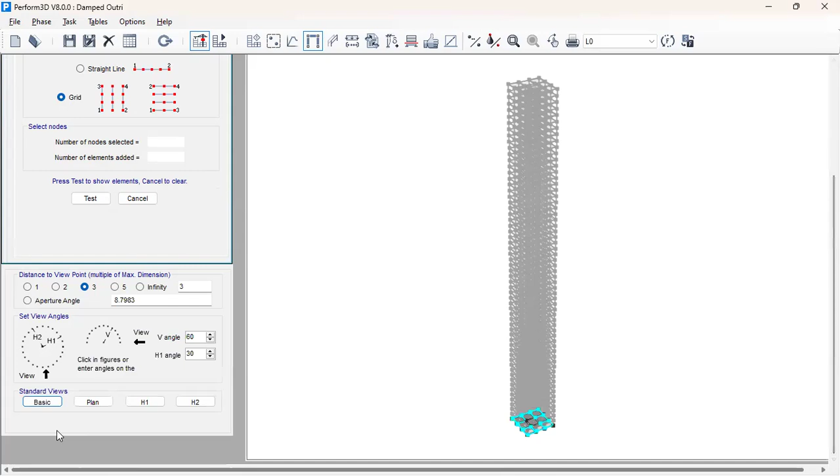So here, at the first or starting point, we have to start from the node points. The nodes have already been assigned and the geometry of the structure has been defined. If we select node 12, this one is the fixed support. For example, if we have to assign the pin support, then we have to go for this in detail. So this one is the pin support.

And also if we have to assign the roller support, we have to go for this one, vertical displacement. And if we select some nodes, now I select this node. Yes, this one is the roller. And this is the inserted boundary. By translation, we have to go for assigning the mass.

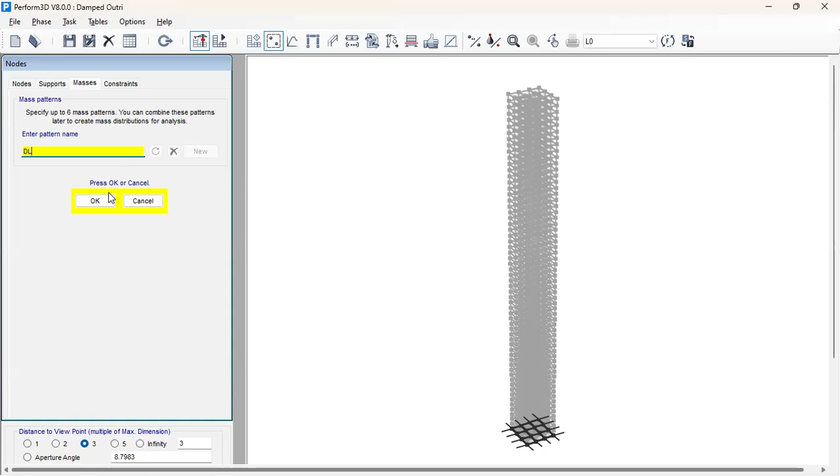First of all, let me introduce the name of the mass source. Let me say dead load 0.25 live load. Okay. Then we have to specify the weight or masses and optional tributary area, like translation or degrees of freedom for translation and degrees of freedom for rotation. So it is 6 degrees of freedom at the node. This can be applied in different ways.

The first way, the simple way, is to import the structure from ETABS and the mass source can be assigned to each node of this structure. And another way is to insert the coordinates and we have to calculate the center point of the structure or lump mass at the story level. We have to input the coordinate here at each story level and input that lump mass.

And another way is to import the coordinates as well as the lump mass as a CSV comma separated file or text file, which can be generated in ETABS.

So I'll try this one. So let me check in ETABS. If we run the structure, first of all, we have to analyze the structure to generate the story mass by diaphragm and export those masses into an Excel CSV file or text file and import those files into Perform 3D, which is

compatible in Perform 3D. So here if we see the display table, we have to go to other definitions for mass data, then click mass summary by diaphragm. Let me check. Yes, these are the masses summary by diaphragm. So let me export these masses to an Excel sheet and I will convert this into a CSV file. So the Excel sheet is generated here.

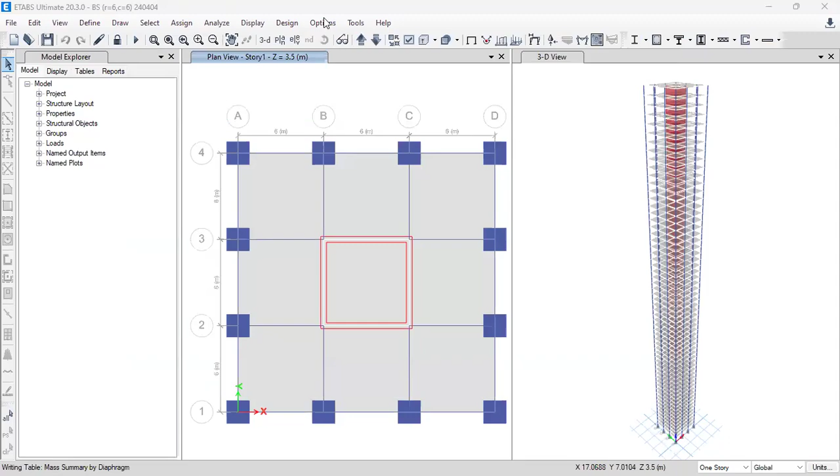Now first of all we have to import the nodes only. For the node to be imported, this line must have H1, H2 and V coordinates of the node and may also have the load or mass. Nodes must be set before load or mass have been imported. So first of all, we have to import the nodes for the diaphragm masses, and after that, we have to import the masses or load. So let me make that Excel file compatible, a Perform-readable file.

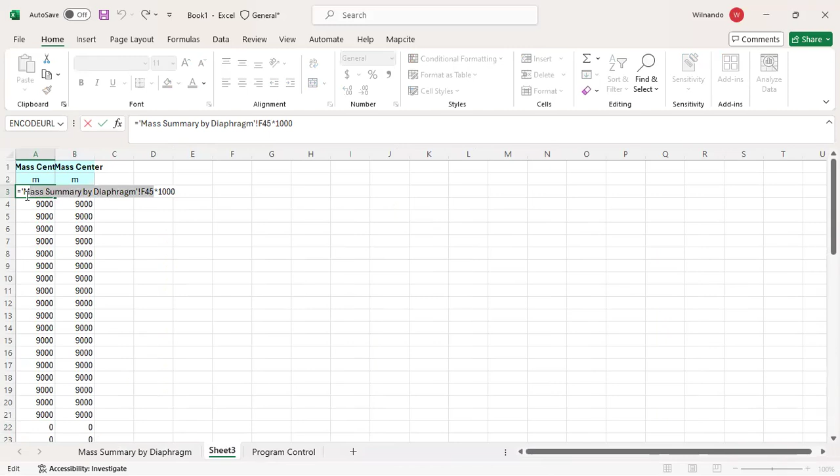After that, we have to go for H1 translation, another one is H2 translation, third one is V translation, fourth one H1 rotation, H2 rotation, and finally V vertical rotation. So here we have to copy the masses in X for this one, and this one is 0. There is no value for V translation. Similarly, H1 rotation is also 0, and H2 rotation is also 0.

And the value given in the table is moment of inertia, which is called V rotation. This value is rotation along the Z direction. Okay. So let me shape this V rotation. This value is rotation.

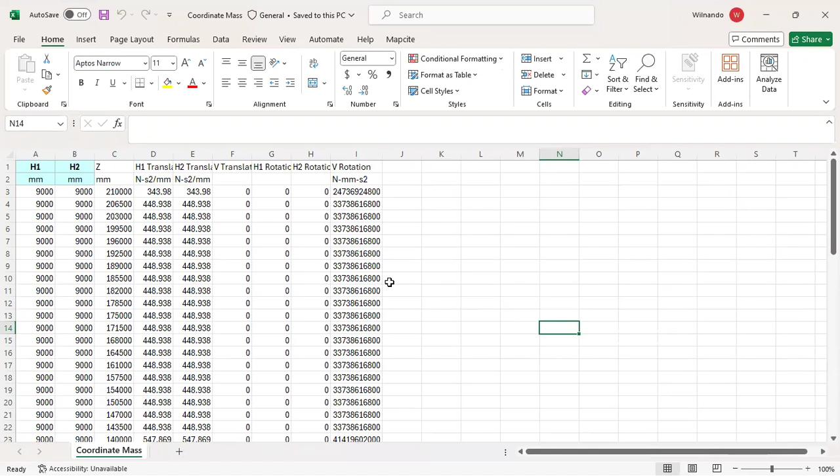So let me import. Yes. Comma delimited file, somewhere in my system. Yes, right, this one. And at the time of importing the file into Perform 3D, you have to skip the first two lines. Okay.

So let me import this coordinate CSV file here. Then from the import option, go to nodes only. I browse the location, the coordinate file which I recently saved, and we have to skip the first two lines, as I already mentioned, in the CSV file. Then this file contains load or mass. Yes. Let me test. Okay.

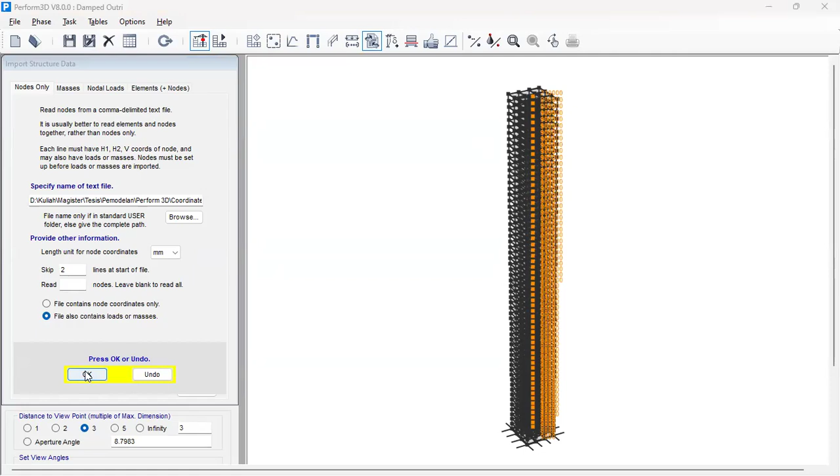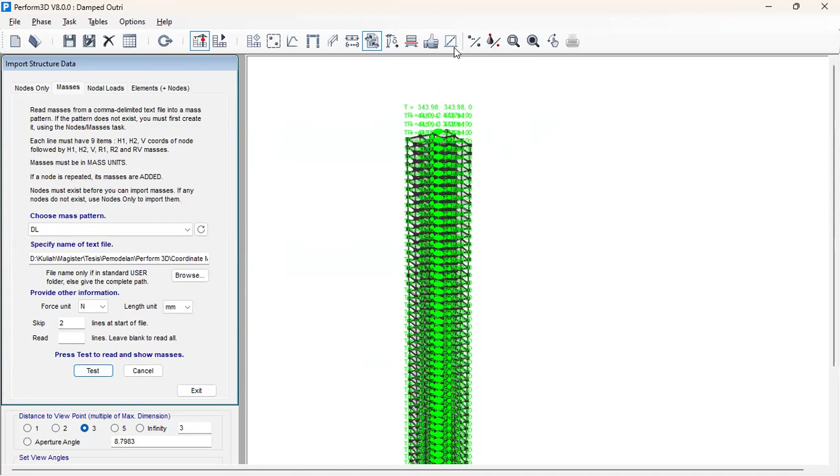Okay, the masses which have been copied in the CSV file have been read by this software by importing the comma separated file. So let me check. Okay, after doing this, we have to update the story level, because at the story level the coordinates for lumped mass have been assigned. So we have to assign this coordinate in each story. So if I go to frame here, let me go to story one, and let me check this.

So let me convert this 3D into this elevation, either H1 or H2. Then for story one, other nodes have already been selected and assigned, and the remaining node is the last node we had just assigned for the lumped mass system. So this is updated.

And similarly for story two, there is also only one value. So this is the point where in ETABS we saw the diaphragm like this. Yeah, like this we assign for these coordinates. So after this, we have to go for constraint.

In ETABS or other FEM software, the diaphragm is assigned either with the help of joint or with the help of shell: shell diaphragm or joint diaphragm. So in Perform 3D, we have to first

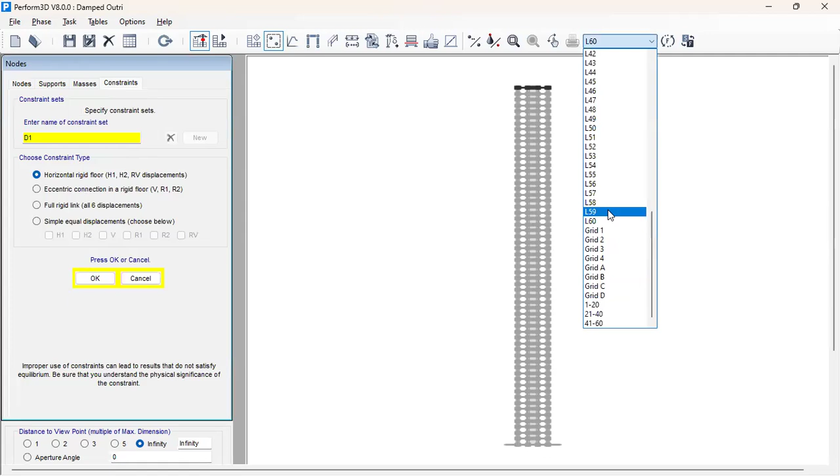And if we go for story one, okay, so let me select this and assign the diaphragm. Story one, yes. Again, if we define another one for story two, let me go for story two, this one, and finally for story three, select this, and check that.

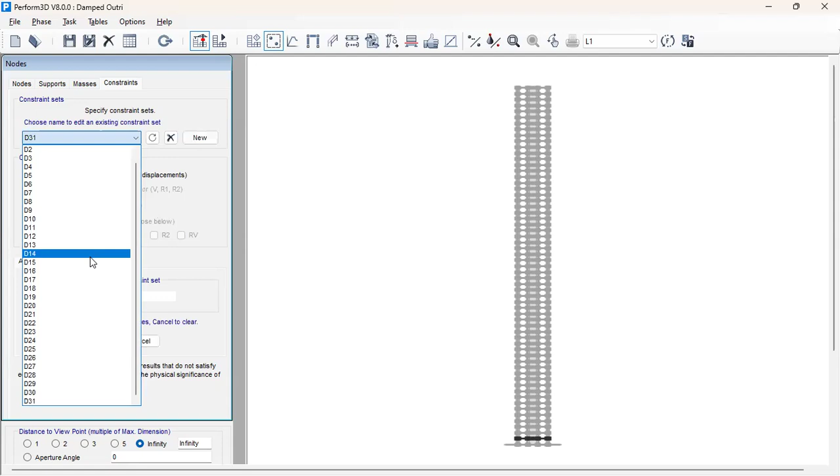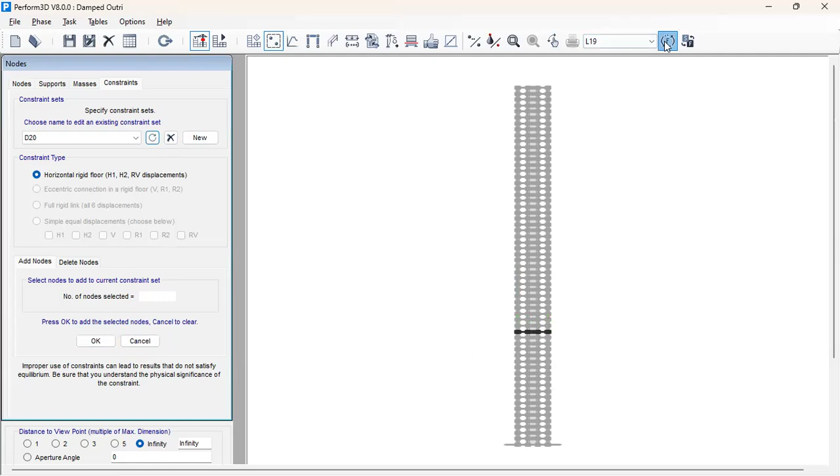So the complete work for node, element, support, mass, and constraints has been done in this model. And in the next video, we'll continue from here. It means we will assign the properties of the elements and finally run the structure to obtain the modal properties of the structure.

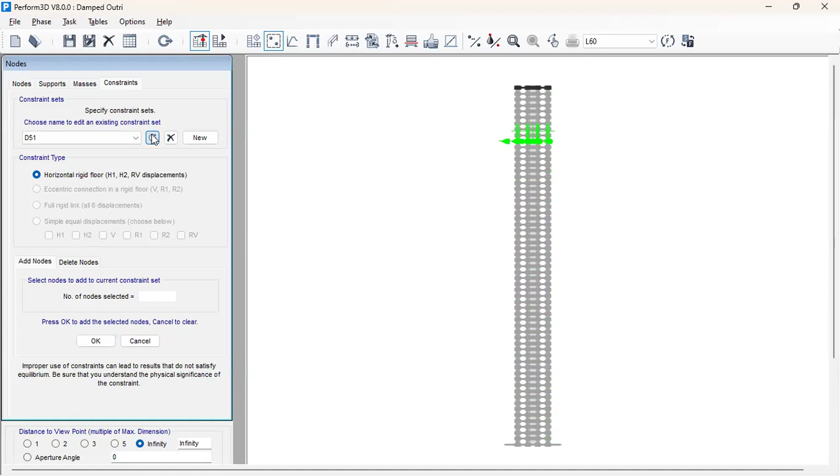So today in this video, the properties of the structural elements that we define and apply by taking the component of each element like beam, columns, or slab. In the previous video, the orientation of the elements has been done, as well as the addition of elements, support system, constraint or diaphragm, and the application of seismic mass or seismic weight of the structure. So today, let me go to the component properties.

Here, there are 6 properties in components. The first one is the material. You can see all types of material we have to use in the structure for modeling purpose. For example, here is an inelastic 1D concrete material. Then the inelastic steel material, which we assume as Fe500 or Fe400 or

Fe550 for the structure. Then these are the inelastic steel material for tension only, for buckling, then elastic shear material for the wall, diagonal compression material for the wall, and elastic material for fiber sections. In linear analysis these are not needed, but for nonlinear analysis and performance prediction, material definition is mandatory. Without defining confined and unconfined concrete and rebar material, further work cannot continue.

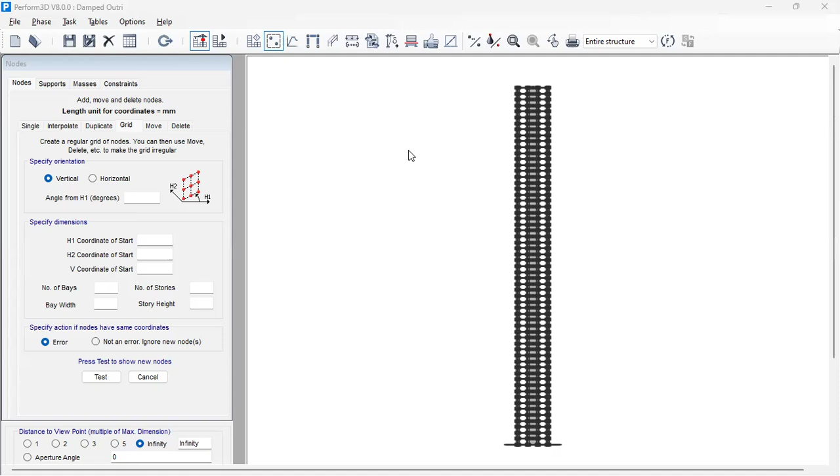So here, another one is the inelastic. In inelastic, there are also different parameters that we need to assign in our structure, defined in this step. For example, to assign the moment hinge rotation type for the beam element, we can select this one, with a trilinear backbone relationship: bending moment in the y direction and deformation in the x direction.

These parameters have to be applied here. So here, this model is only for linear purpose. We shall discuss more detail about these nonlinear things while doing nonlinear analysis. So for now, let me go to the material. First of all, we have to assign that. So let me use elastic material for the slab or shell.

And so here we have to assign the stiffness parameter. So here, if we take the M20 concrete, then the modulus of elasticity is 22361, which comes from the formula 5000 root FCK. Then Poisson ratio for concrete is 0.2. So let me check and save.

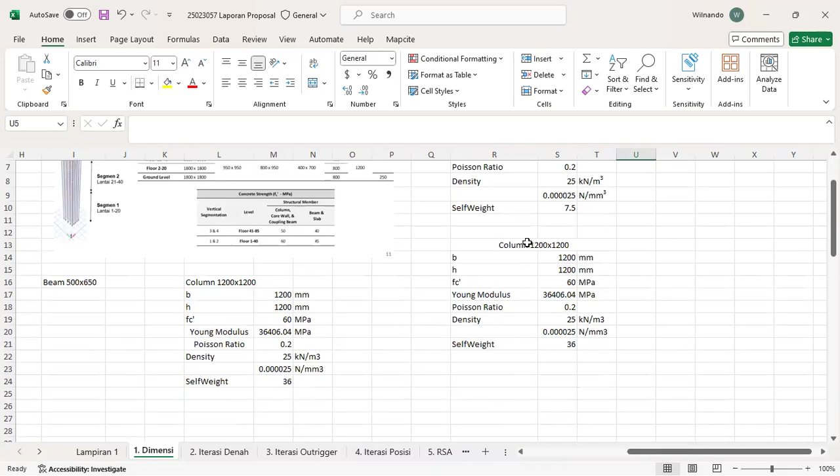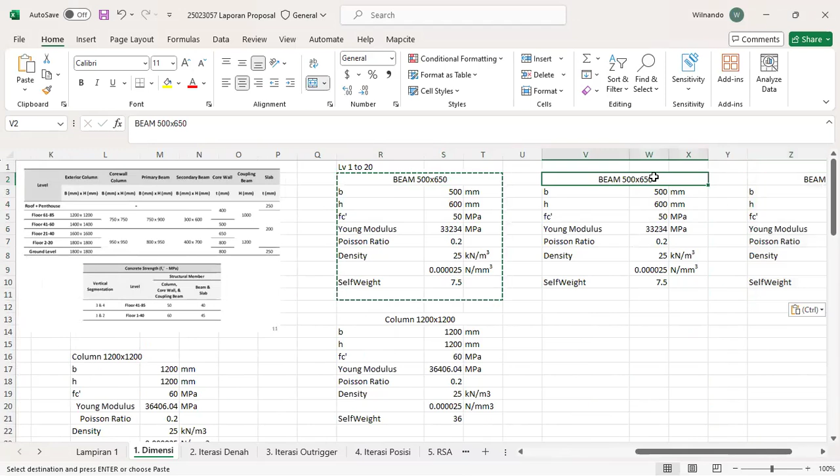Then if we press the calculate button, the parameters have been calculated here: axial area, torsional inertia, shear area, and bending inertia. So for the material stiffness, we already said that modulus is 22361 for M20 concrete. Poisson ratio for the concrete is 0.2.

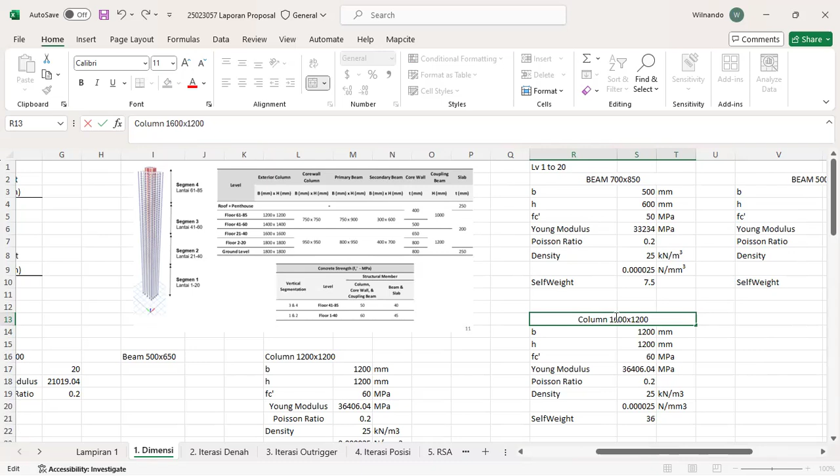And this shear modulus is calculated by the formula which we have already studied in strength of materials. So let me check, the shear modulus is calculated there with the formula relating Young's modulus and shear modulus. So here we cannot go for inelastic strength at this tab now. So the section of the beam is defined.

Then the column section, 350 into 350. Okay. Then similar like beams, 350, 350, calculate, 22361 for M20 concrete, Poisson ratio for concrete, and let me take.

Then another one is the slab. So we define new slab 125. Okay. Then this material is the slab we have defined in material tab. The thickness of the slab is 125 mm. For membrane also, the slab is 125 mm.

So here, thickness for weight calculation means we have to calculate the dead load of the slab. So for that purpose, the thickness is 125 and weight density of the RCC is 25 kilonewton per meter cube, means 25 into 10 to the power minus 6 Newton per mm cube. Okay, the section of the slab has also been defined.

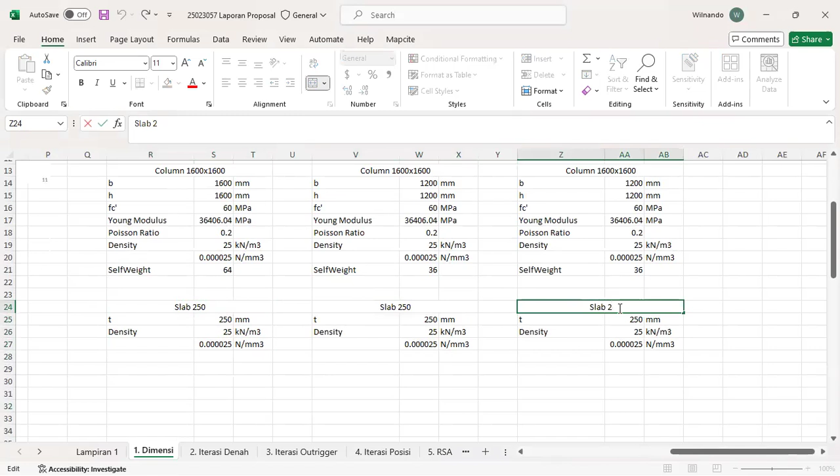I named it column. So here the component column is treated as elastic section. We have already defined the component. So the proportion of length is 1. And let me check. So here the compound has been made with the column element. Okay. We check this. This is the whole column element with the elastic section.

Here we can add the hinge zone also. For example, hinge zone for a beam or column according to ACI 41 or ASCE 41. So for simplicity now I do not model the hinge zone for this structure.

Similarly, for the self-weight purpose, the self-weight per unit length for each compound element has to be assigned. So for column, let me go to calculator. Size of the column is 0.350 into 0.350 into 25, which is 3.0625 kilonewton per meter or Newton per mm. Okay. Then I define beam compound.

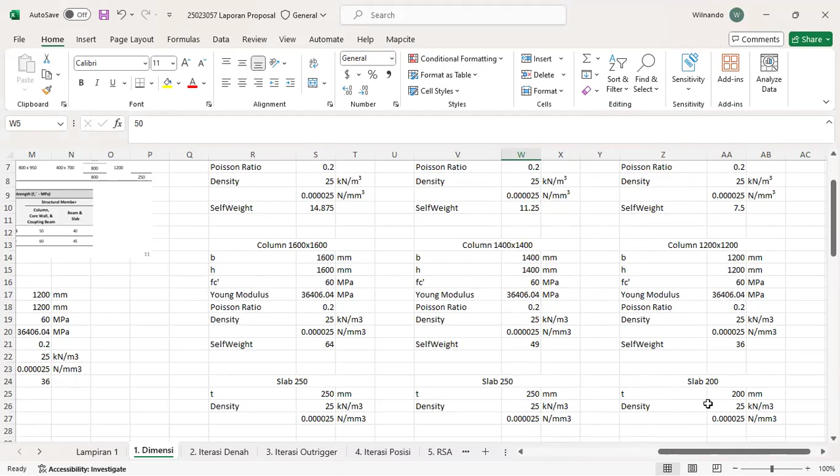Beam compound. Similarly for basic component, here we can select the beam section. It's 1, click add and go to self-weight section. 0.3 into 0.35 into 25, 2.625 kilonewton per meter or Newton per mm. So the compound has been finished, and let me close this tab and go to elements.

We have to assign the properties which we have just defined for the beam and column. So these blue elements are the beams. Go to properties tab, select all the beams, then assign component, frame member, then beam component. Let me check assign. So these beams are assigned as elastic beams, 300 by 350.

Similarly, let me go to columns. Columns have been selected. Properties, assign component, frame component, column, assign. If you want to show the properties of an assigned member, this can be done from the show properties tab.

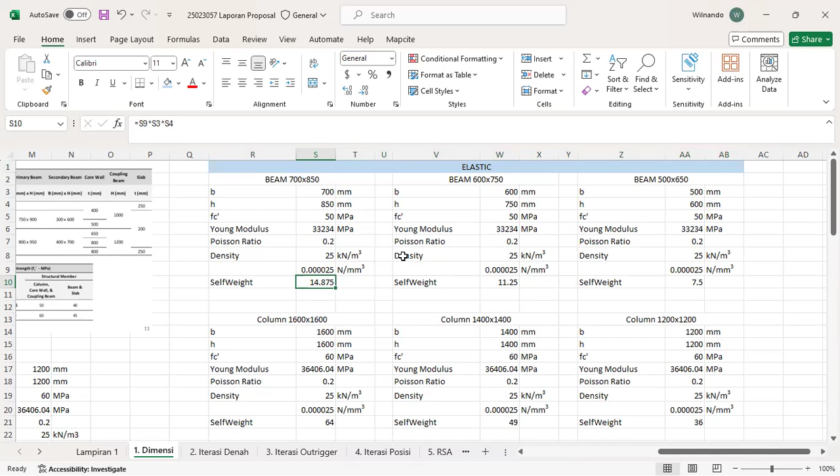So here the component will be assigned and the properties as defined. So for the slab, assign component, slab or wall elastic section; you have to define the concrete material, M20 for the structure. Then these are the elastic steel material for tension only, for buckling, and elastic shear material for the wall, diagonal compression material for the wall, and these are not needed.

But while doing the nonlinear analysis or performance-based design, time history analysis in Perform 3D, the respective material definition is mandatory. So without the definition of the material, for example, if we take the reference concrete, the confined and unconfined concrete and rebar material, any further work cannot continue without the material definition.

So here another one is the elastic tab. In elastic there are also different parameters, which are to be applied here, which is the slab or shell. So then let's move to the slab. So let me choose elastic material for the slab or shell.

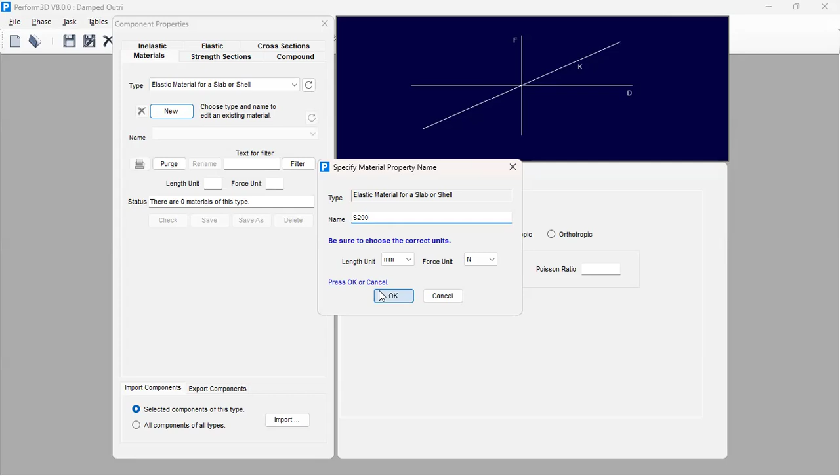Slab, the unit is mm, and so here we have to assign the stiffness parameter. So here, if we take the M20 concrete, then the modulus of elasticity is 22361, which comes from the formula 5000 root fck. Then Poisson's ratio for concrete is 0.2.

So let me check and save. After that, let me go to cross sections. Here there are different cross sections for beam, column, shear wall, and slab. So let me choose first the beam cross section. Go to new, 350. Okay. Then our beam is rectangular in shape.

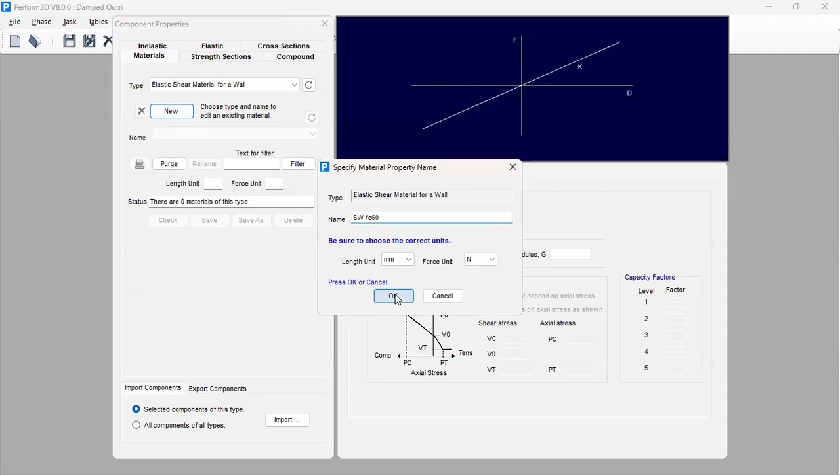The width of the beam is 300 mm and depth of the beam is 350 mm. Then if we press the calculate button, all the parameters are calculated here: the axial area, torsional inertia, shear area, and bending inertia. So for the material stiffness, we already said that modulus is 22361 for M20 concrete. Poisson's ratio for the concrete is 0.2, and the shear modulus is calculated by the formula which we have already studied in strength of materials.

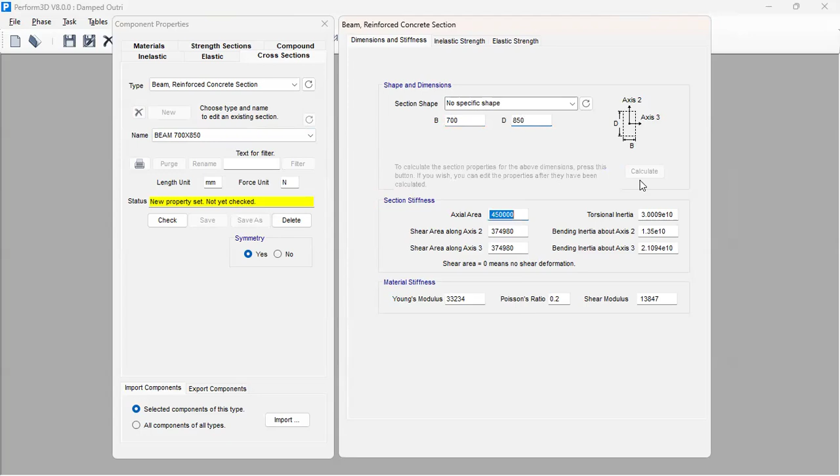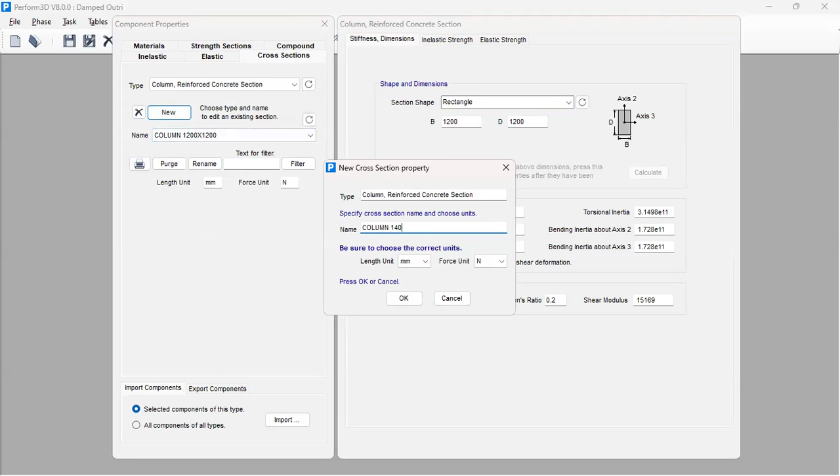So let me check, and the shear modulus is calculated here with the formula relating Young's modulus and shear modulus with the Poisson ratio. So here we do not go to the inelastic strength tab now. So the section of the beam is defined. Similarly, the column section is also defined, 350 into 350. Okay. Then similar to beams, 350, 350. Calculate, 22361 for M20 concrete, 0.2 for concrete Poisson ratio.

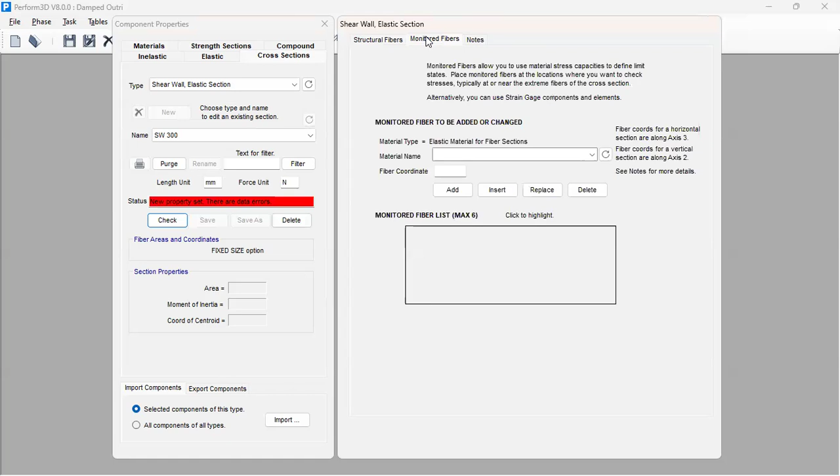Then let me check. Then another one is the slab. So we define new slab 150. Okay. Then this material is the slab we have defined in the material tab. The thickness of the slab is 150 mm. For membrane also, the thickness of the slab is 150 mm. So here, thickness for bending calculation means we have

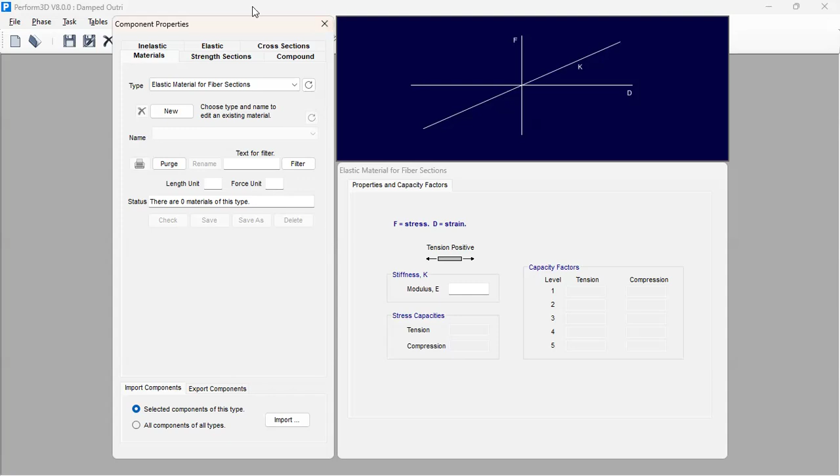For the cyclic degradation factor, I took the reference from this paper, following the paper of these professors. So all the energy degradation factors for Y, U, and X points are the same for all the phases of the nonlinearity. And the unloading stiffness factor, I put here minus 1. For more detail, you can follow the Perform 3D user guidelines. The value of -1 or 0 is the same for this. Here.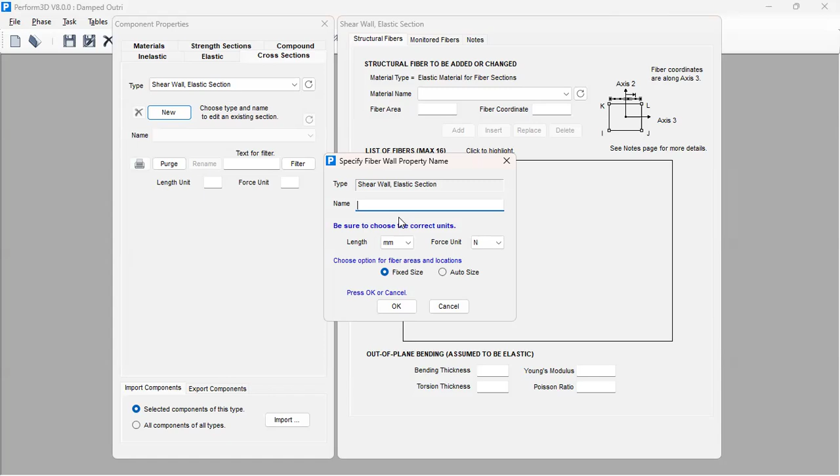So let me turn into unconfined. Okay. Then the fiber is prepared for unconfined. With the fiber done, let me turn into the compound elements.

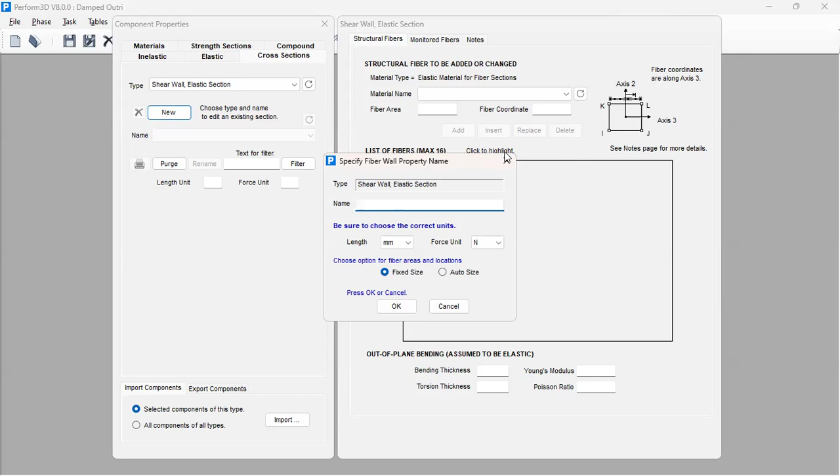For many purposes, I think elastic shear properties... elastic shear is brittle and so the shear value is set for shear. So it's positive or negative in this unit. Then for the web zone, only the properties change here and everything is the same.

Then after assigning the material and compound element for the web zone or boundary zone, we will continue to click pushover.

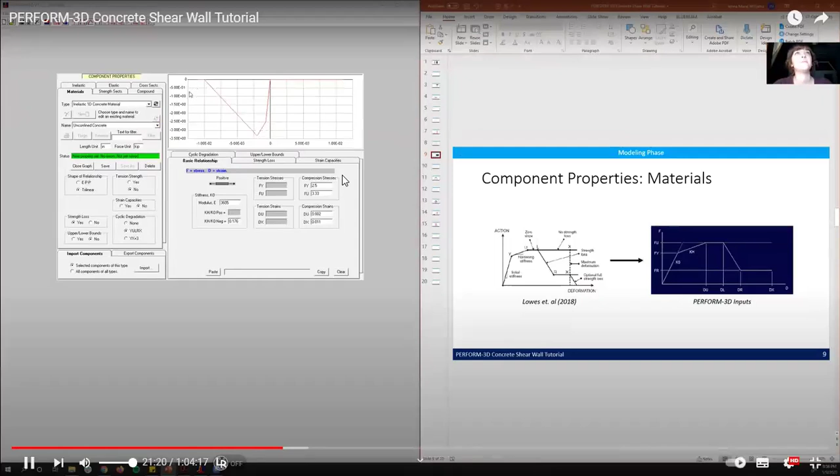We can see that Perform 3D has provided us with a graph so that we can look at what's happening. If I go back to this previous slide, you can see what all of these points really mean. So right here, we're experiencing the initial stiffness of the concrete. Next will be that hardening stiffness it goes through. And then we have strength loss that occurs. Pretty straightforward in that respect. Again, this is on the compression side, and make sure that you're clicking that save button.

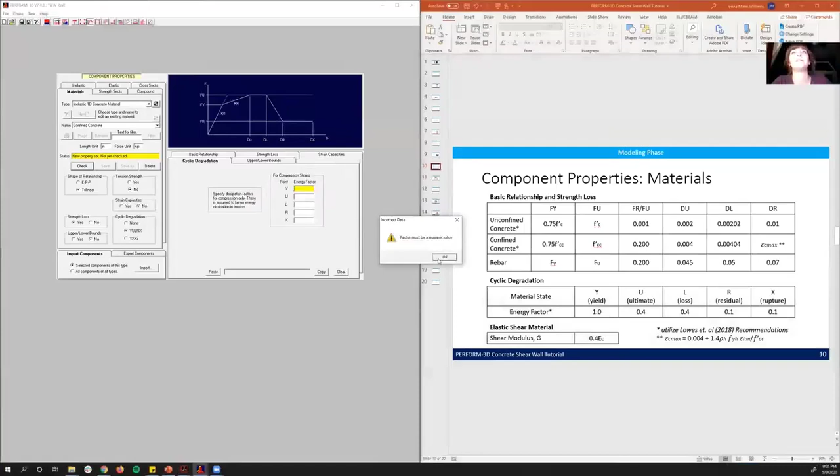On the strength loss side, our DL will be 0.00404. Looks like we forgot our cyclic degradation. Perform 3D was nice enough to remind us. We'll go ahead and put in those values like we did before. So we're going to go ahead and click. I'll just call it rebar since we only have one relationship. Again, this is from a constraint.

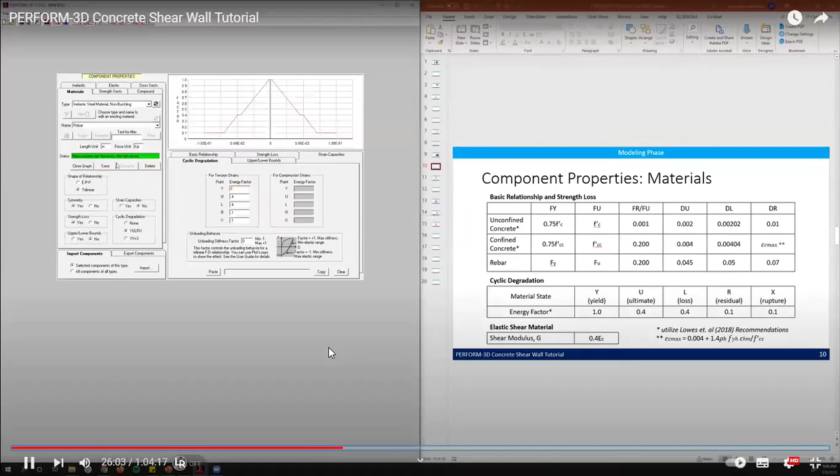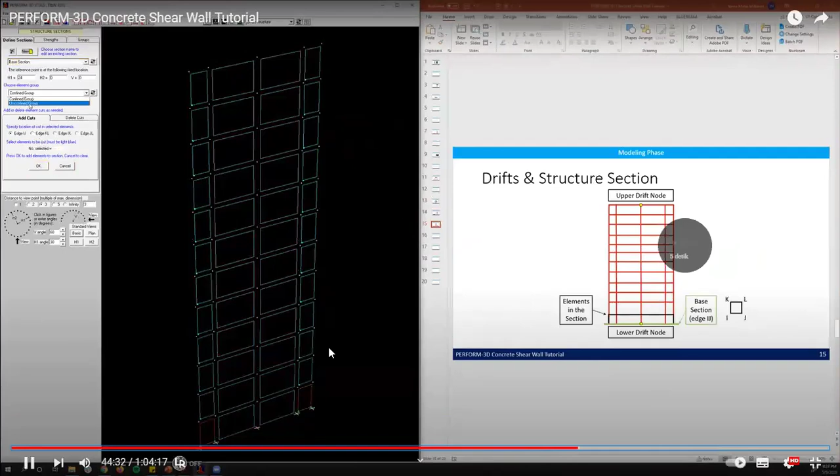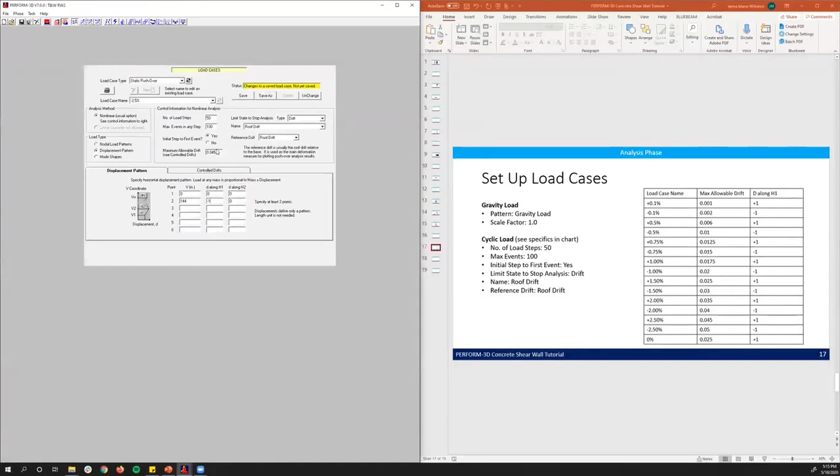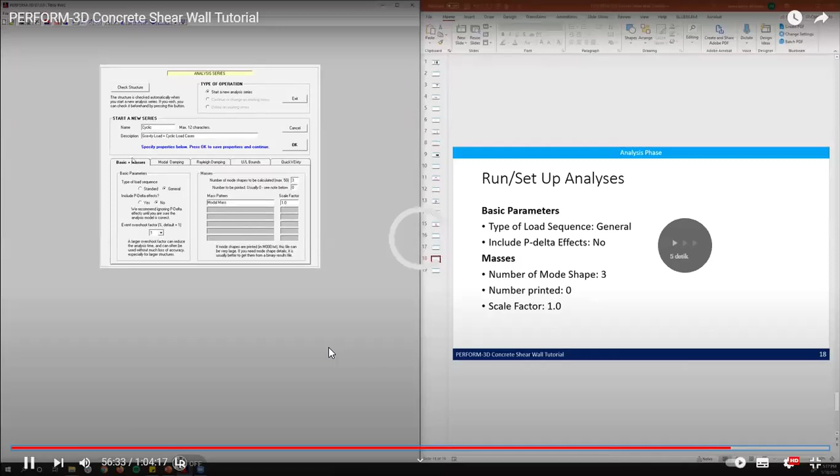In our last position, we're going to spell cyclic: gravity load plus cyclic load cases. Again, just another description. Our type of load, we don't want to include P-delta effects. Our number of mode shapes will be 3. The number printed is 0. I think I mentioned this earlier, but for this analysis, we end up with 16 different steps.

I'll go ahead and scroll to the top and click run this set of analyses. Go. And now it is running the case. It shouldn't take long. We've been working with the H1 force and we'd like more history, and it looks funny because we're not at full screen, but let's go ahead and go to full screen.